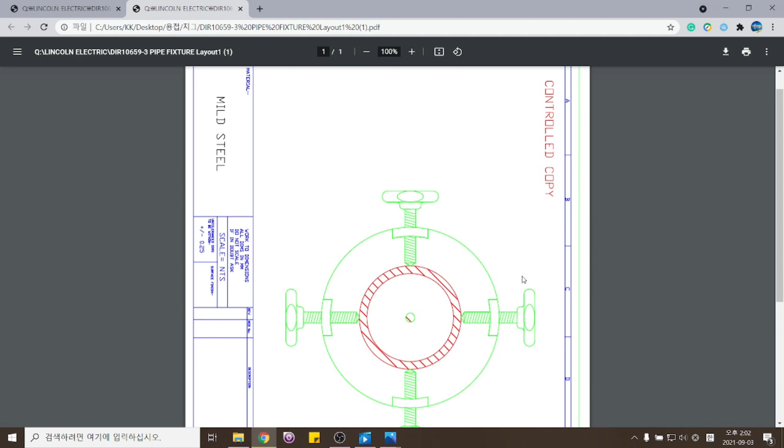After the first class, there was a question about what kind of jig we use. The answer is that we use the Lincoln jig, and here is the jig diagram, the pipe jig diagram. This is for 6G pipe.

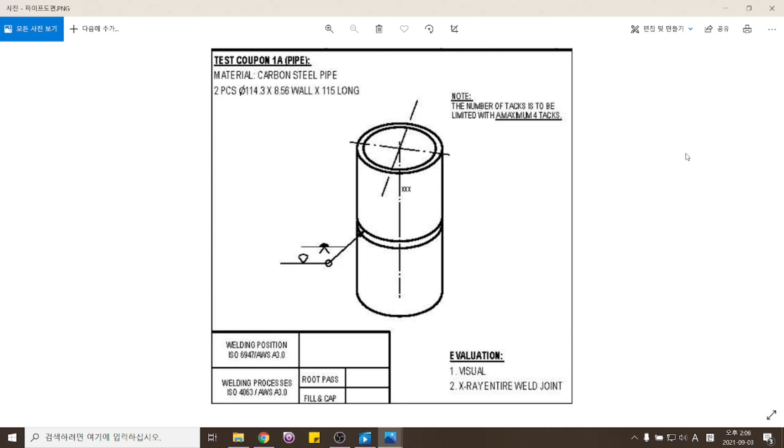As mentioned, the posture is decided right before the competition begins, along with the process to be used for root pass, fill pass, and cap pass. Right before the beginning of the actual game, the posture and working method will be revealed on site.

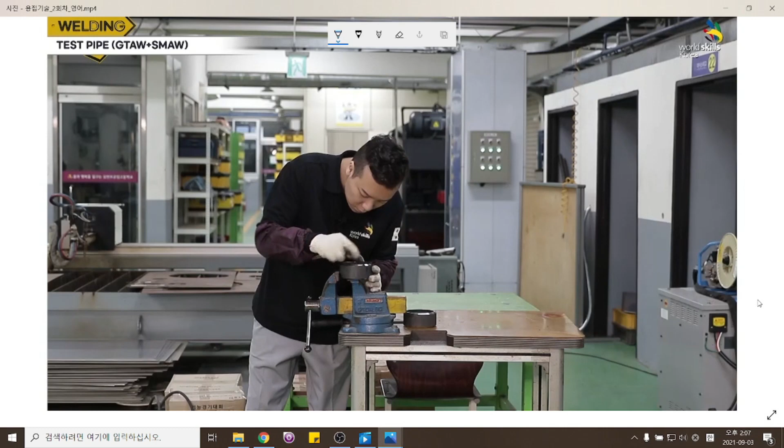Hold the pipe in a parallel position with a horizontal vise. Draw a line at the spot, allowing 2 mm root face, using vernier calipers.

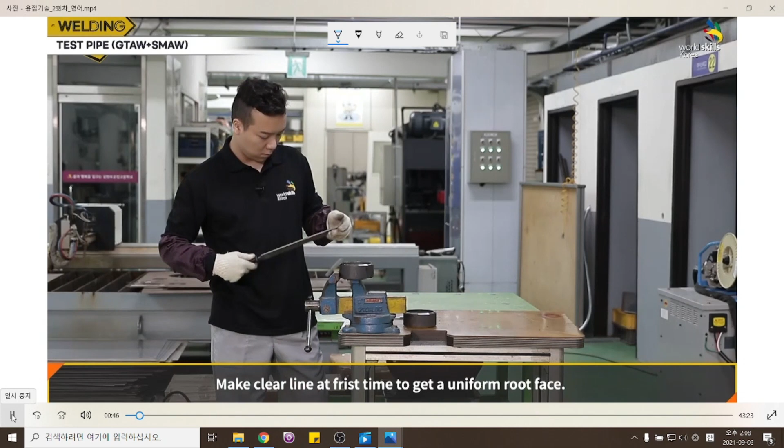Process the root face evenly up to the marked line. Check the thickness of the root face and make a flat, even horizontal surface.

After preparation of the root face, remove burr with a file.

Pipe tack welding. As mentioned, when processing the root face, if the root face size is not uniform, the welding current value becomes larger or smaller. So it is very important to process the root face evenly, because the electric current might change depending on the status of the root face.

The V-groove block you see on the screen is one we made ourselves, cut from angle steel. I encourage you to make one for yourself and use it to hold the pipe with the V-groove block, since the pipe is round shaped.

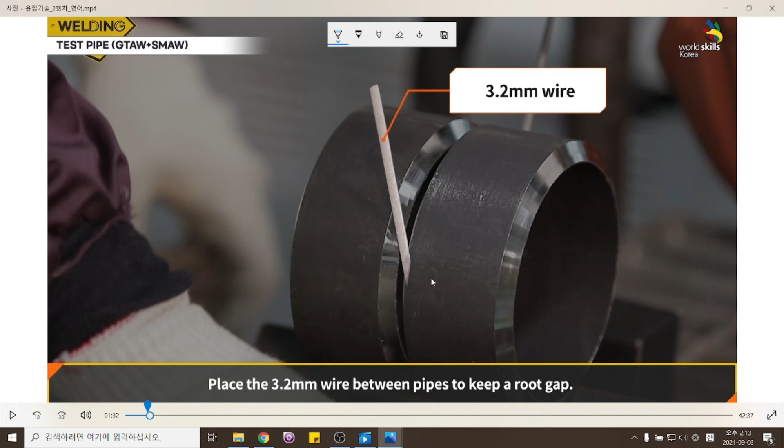Place a 3.2 mm welding rod between pipes to keep a root gap. To maintain the root gap evenly, we insert a 3.2 mm wire here, which is an SMAW wire with the coating stripped off. Using this 3.2 mm diameter wire lets us maintain an exact 3.2 mm gap between the two test coupons.

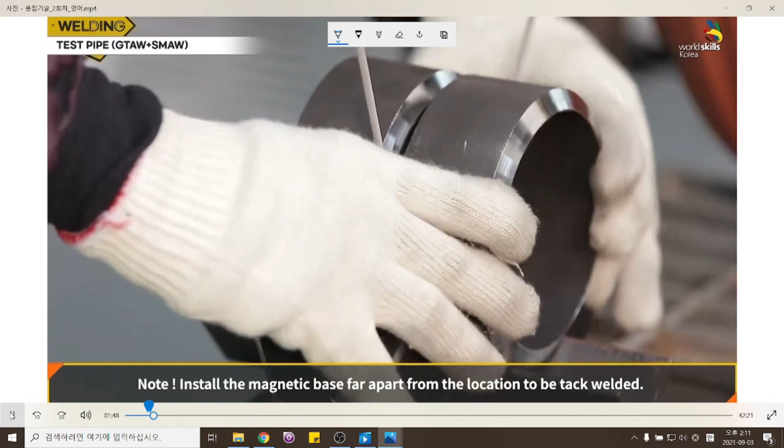Sharpen a tungsten electrode. The sharpening length shall be 2.5 to 3 times the electrode diameter, cut away 0.4 mm. The tungsten electrode used here contains 2% thorium.

When grinding the electrode, the tip must be sharp and pointed, otherwise you won't get the correct electric current value you want. The grinding wheel rotates in this direction, so you must grind in this way to avoid creating a burr. Please keep in mind the electrode must be sharp because the electric current might be affected by burr on the wire. Make sure you use your grinder in this rotating direction so there is no burr on the wire.

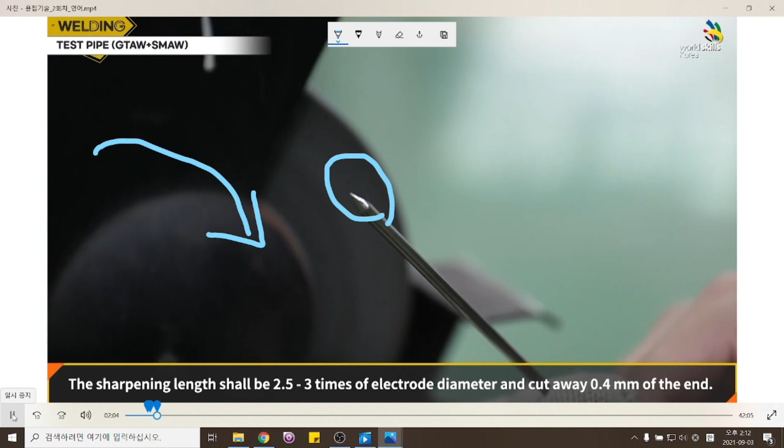Insert the sharpened electrode into the torch. The tungsten electrode stick-out shall be 1 to 2 times the diameter.

Tack welding. Weld only one tack at the 6 o'clock position. Use GTAW for the welding process, with welding rod T50, 2.4 millimeters. The length of the tack at the starting part shall not exceed 15 millimeters.

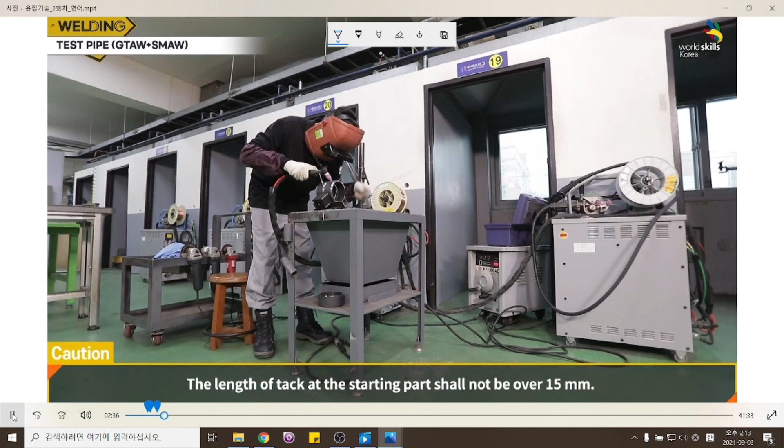Remove the magnetic base and the 3.2 millimeter welding rod inserted between the pipes. To align the overall root gap, widen the gap slightly with a spot weld hammer. Rotate the pipe coupon to make a tack at the 10 o'clock position and keep the root gap by inserting a 4 millimeter welding rod.

At the very start, it's good to maintain a root gap of 3.2 mm. I encourage you to keep the 3.2 millimeter root gap at the start point.

The tack length should not exceed 15 mm, so it's good to tack within that limit. When you tack, the tack length must not be longer than 15 millimeters.

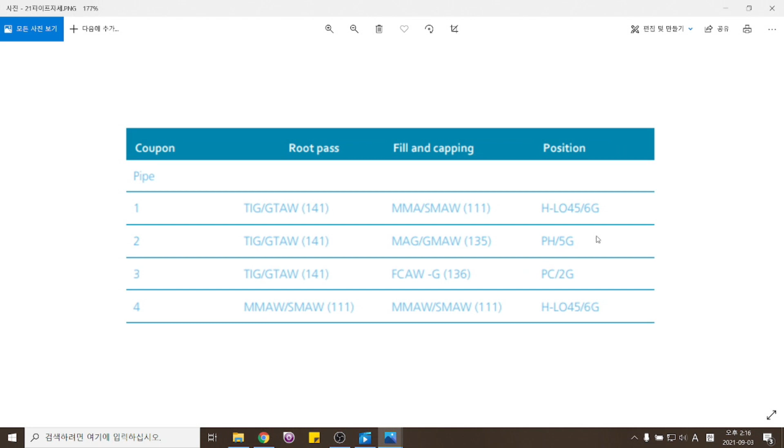I'm sorry, there was an error in the beginning and I'd like to correct it. Instead of the fourth coupon that I said we adopted, we actually adopted the first one.

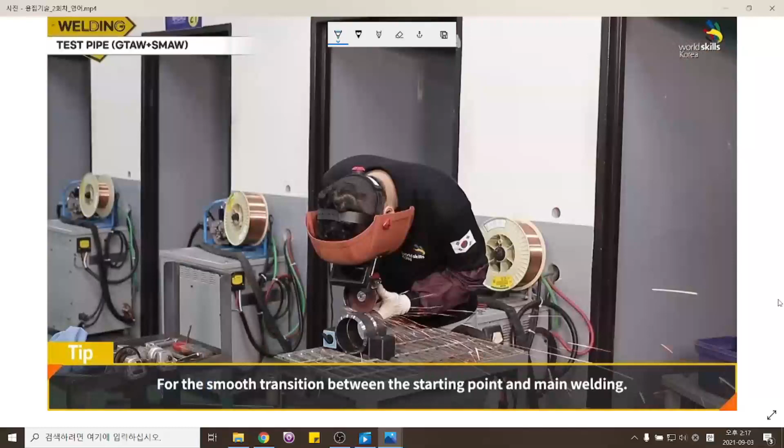Root pass of pipe joint welding. Prior to welding, grind the surface of the tack weld at the starting point. The reason for shaping with a grinder is for smooth transition between the starting point and main welding. Make a U-shaped groove on the tack weld of the start point with a grinder fitted with 4T. Check the condition after grinding and fix the pipe coupon with a 45-degree jig in 6G position. The starting point should be located at the bottom. Fix the pipe securely without any movement.

Root pass welding. GTAW is used for root pass, and the welding rod is T50, 2.4 millimeters.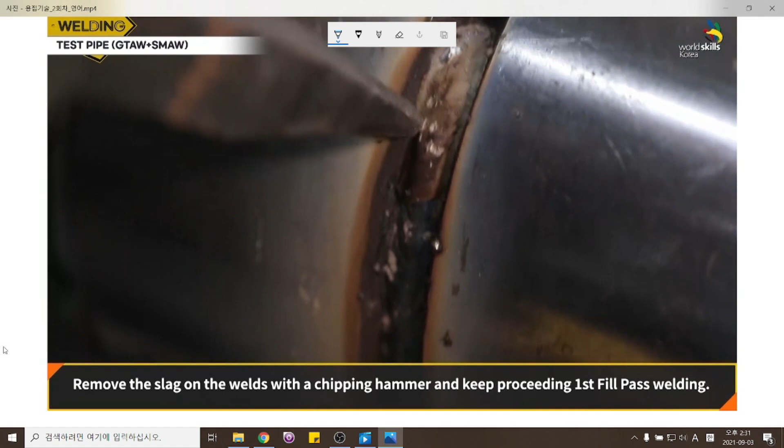Average length of SMAW electrode is 350 millimeters. Due to the limited length of the welding electrode, stop-start cannot be avoided. Remove the slag on the welds with a chipping hammer and keep proceeding with the first fill pass welding.

Adequate work angle for filler metal is 75 to 85 degrees. If the work angle is over 85 degrees to the opposite side, it makes slag stuck into the groove. Bead connection shall be ground prior to welding. By making a U-profile groove, the molten puddle can flow smoothly without overflowing into the other area.

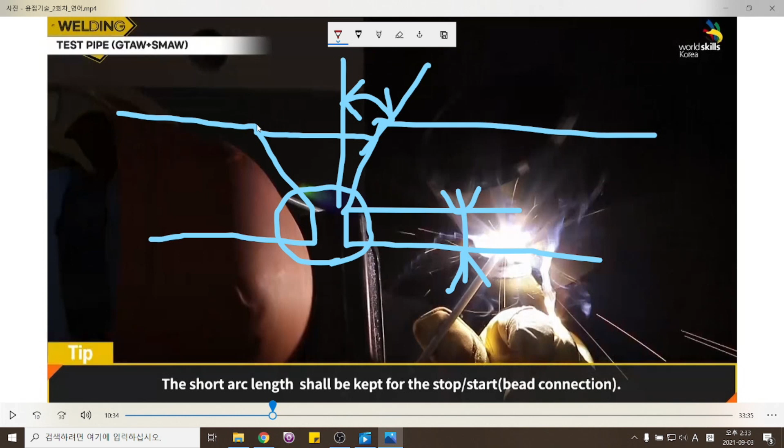Please take a look at the blue line. This is the edge line of the bevel angle, the edge part.

I also call this line the lifeline, or in other words, the control line.

When working on the fill pass, this second fill pass, you must not interfere with this control line at all.

This is because when covering the fill pass and cap pass, this line becomes the reference line. When adjusting the bead width, if this line gets disturbed, you cannot make the bead straight. The guidelines you see are the control line, so if you go over that, you cannot control it adequately.

So to keep the bead even, you must not interfere with this control line, this lifeline, while welding the fill pass. This is a very, very important part.

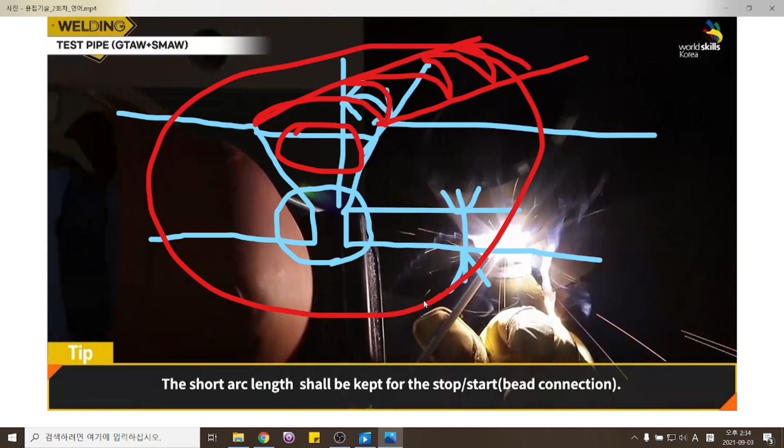The short arc length shall be kept for the stop-start bead connection. To deal with the last crater, keep the short arc length and stop quickly.

This part is the lifeline, the control line. It must never be touched while welding the fill pass. Take a closer look at the picture on the right. As I mentioned, this is the control line. See how our competitor does not interfere with those two lines while working on the fill pass.

Stop 5 to 10 millimeters ahead of the endpoint. Remove slag with a chipping hammer after the first fill pass welding, and grind off the excessive reinforcement and uneven beads.

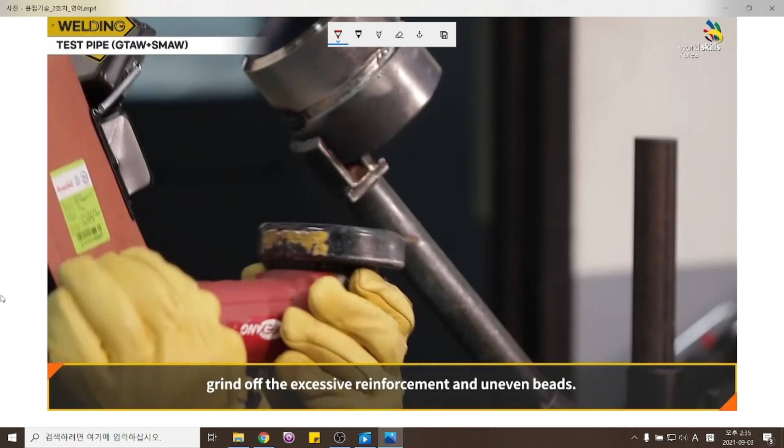The section welded in the overhead position would have a higher chance of defects because of the unstable welding position. If in doubt, clean up with a grinder and machine it accordingly.

Fifth one is the second fill pass. Weave pattern is the same as for the first fill pass. Weld the left side first and then the right side.

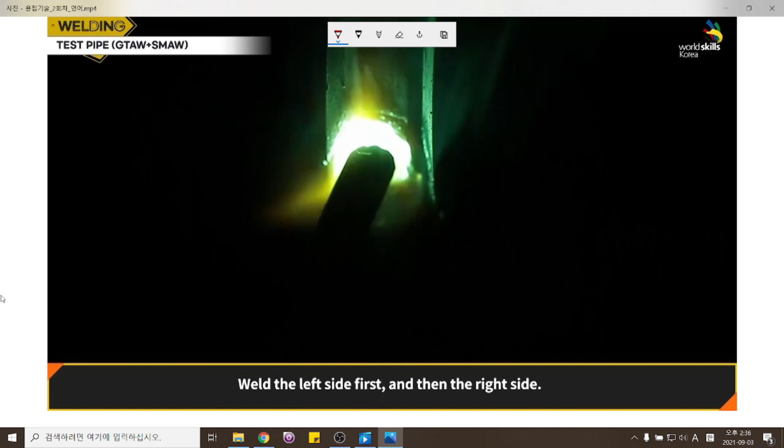Depending on the welding position, keep the travel angle approximately 70 to 85 degrees. Keep a small weaving pitch and short arc length, welding following the travel angle. Deposit the welds up to 0 to 1 millimeters below the surface at the second fill pass.

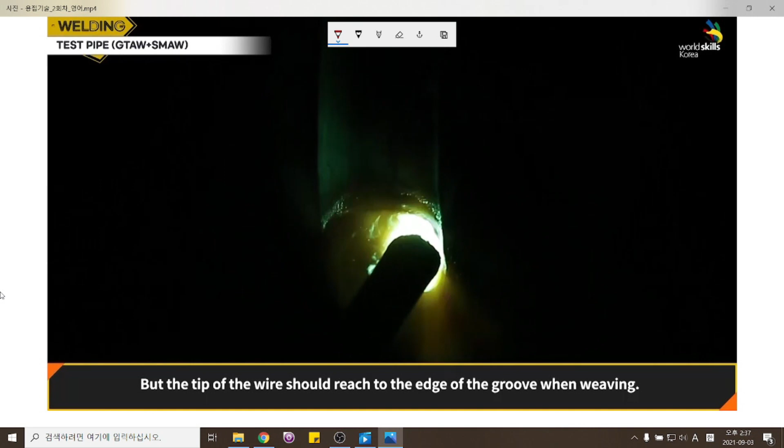Cap pass. Weave pattern is the same as fill pass, but the tip of the wire should reach the edge of the groove when weaving. For cap pass weave, keep the short arc length and pause at each edge while welding.

If travel speed is too low, there is risk of potential defects such as overlap or slag inclusion. Once the welding of each part of the pipe is finished, clean up the contaminant on the welded area. Grind the stop-start point to prevent any defects.

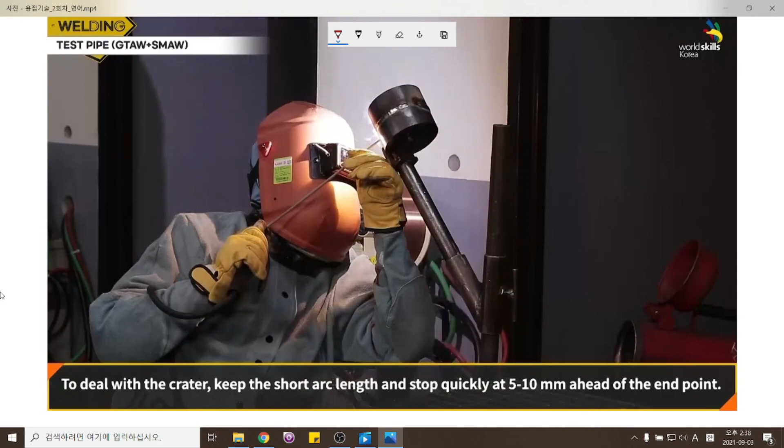Place the wire tip quickly on the next spot because the work angle and travel angle keep changing. To deal with the crater, keep the short arc length and stop quickly at 5 to 10 millimeters ahead of the end point.

Once welding is completed, remove contaminants such as slag and spatter, and clean up with a cup brush. Please check.

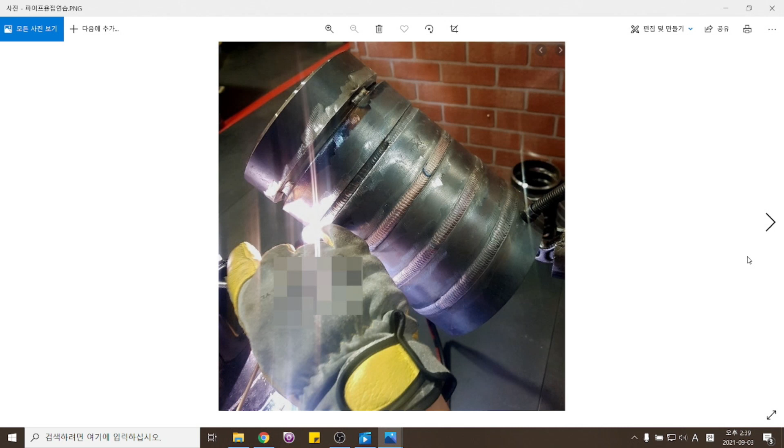So that was the end of the pipe, and considering that the pipe covers a lot of the marks, our competitors take a lot of care practicing the pipe. Let's take a look at the pictures of how we do it.

파이프를 이렇게 짧게 머시닝 작업을 해서 한 자세만 하는 게 아니고 여러 개를 붙여서 계속해서 연습 트레이닝을 합니다. So basically in Korea, competitors machine small parts of pipes, connect several pipes together, and then continuously weld all of the pipes.

이 자세 보이시죠? 이게 이제 우리 5G 자세. So this is the 5G position. 제일 어려운 부분이죠, 오버헤드 부분. This overhead part, we consider it to be the hardest.

이게 다 된 거 한번 보여드릴게요. 이게 백비드를 지금 GTAW를 해놓은 거예요. So these pipes you see are the ones that we are done with. We did GTAW to connect the pipe, take a look at how the root face covers from the inwards.

이건 지금 SMAW 표면의 캡패스. And this you see is the cap pass after the SMAW process.

이건 그때 중국에 갔을 때 찍어온 거예요. 중국 선수가 한 겁니다, 이거. Actually, this is done by a Chinese competitor in the last game.

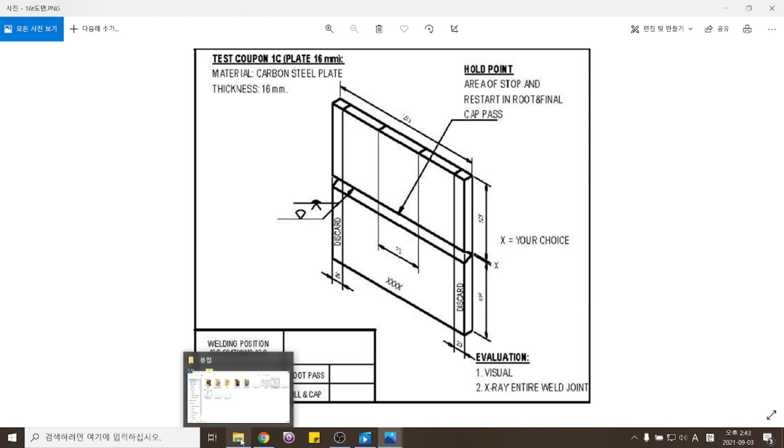As you can see in the instruction, it shows area of stop and restart in root and caps. There could be a root junction or a cap junction. Most of the time the cap was connected, but that will be decided and taught during the actual competition. It's either the root or the cap, and which one to choose will be revealed in the actual game.

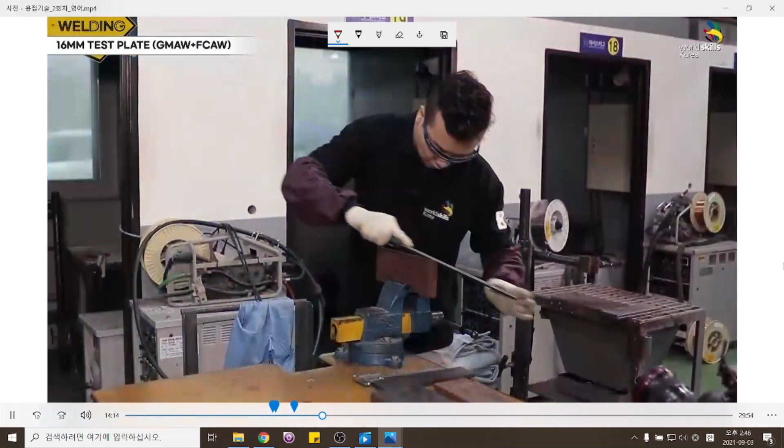Preparation of base material. As it is a single V-groove joint, make the bevel on each plate 30 degrees. Remove all rust from the root face of the base materials with a file.

After grinding the groove angle, draw a 1.2 to 2.5 millimeter line on the root face using a vernier caliper. First, use a grinder fitted with a 2T grinding disc to properly grind up to the drawn lines. After grinding, use a file to precisely grind up to the drawn line.

The reason for root face preparation: if there is no root face, the joint root will melt easily and cause burn through at the joint root of the plate. A grinder may be used to remove shop primer coating on the weld joint.

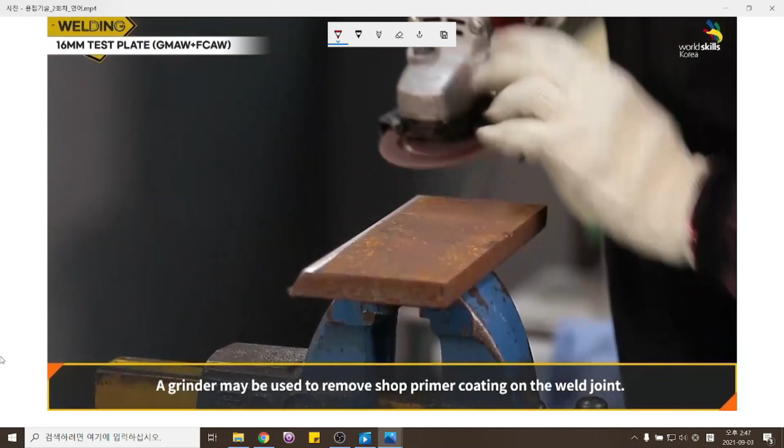Make sure that the root surfaces of the two processed base materials face each other and are uniform without any gaps. The root face of two plates should be the same so that the entire joint can be welded under the same condition. If light leaks through the gaps in the base material, it means the root surface is not constant, so process it again.

Tack welding for base material. Turn the gas switch on and adjust the gas flow rate. Use 100% carbon dioxide gas, with a gas flow of 15 to 20 liters per minute. When reading gradations on the gas flow meter, make sure the gradations and the center of the indicator are in line with each other.

Adjust the root gap and the alignment of the plates. Use a magnetic base to hold the base materials horizontally.

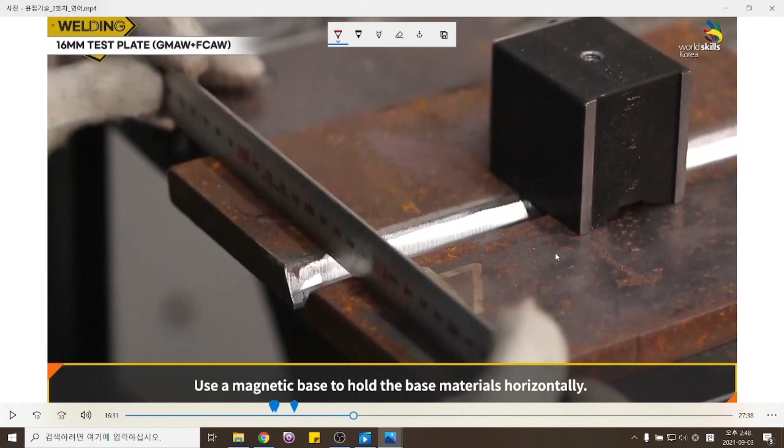As I mentioned in the first class, in Korea we use CO2 gas, but in the international skills competition, WorldSkills, they use MAG gas - argon 80%, CO2 20%. Like I mentioned before, in Korea we use carbon dioxide gas, but in WorldSkills they use gas with 80% argon.

There are pros and cons. When using 100% CO2 gas, the penetration is deep and weldability is good. There are plus and minus points when you work with carbon dioxide gas - there will be deep penetration.

However, when using MAG gas with 80% argon and 20% CO2, the appearance is nicer, but the penetration amount tends to be weaker compared to using CO2 gas. It might look good on the exterior, but the penetration might not be deep enough.

In our training we only use CO2 gas, since it's cheaper and argon gas is more expensive, so we use full CO2 gas. Like I mentioned, we use full CO2 carbon dioxide gas - it's actually cheaper as well.

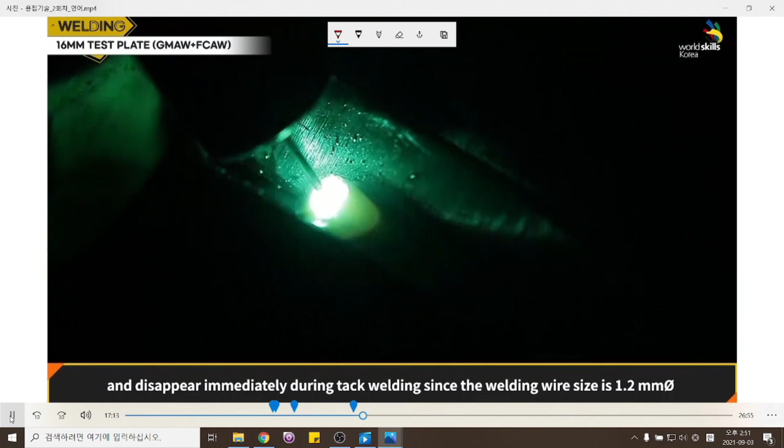There is a case that the arc does not start and disappears immediately during tack welding, since the welding wire is 1.2 millimeters, which is smaller than the root gap. Strike the arc on the groove face and make tacks.

Widen a gap at the end of the base materials. Keep a 4 millimeter gap at the end point because of the shrinkage of the base materials during welding.

If the gap is too tight, widen it with a chipping hammer and check the alignment with a steel ruler. If the gap is too wide, align the gap by hammering, and if there is a misalignment, twist up and down the plates with a chipping hammer to align them.

Insert a 4 millimeter round bar to keep the root gap at the end point. Weld tacks without damage on the base material.

If there is too deep penetration on the round bar, it becomes hard to remove it prior to welding. So, make small tacks to the point where both plates are fixed.

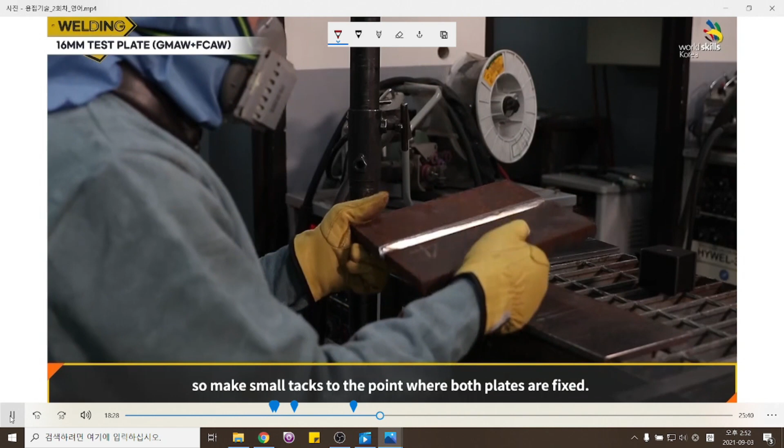When tack welding is completed, check the quality of tack welds. Check the root gap at the start and the end of the base metal and the alignment of the base metal.

If there are incorrect parts, dismantle and do rework.

Main welding preparation and pre-bending. Prior to main welding, make a U-profile on a tack weld at the starting point by grinding with a grinder fitted with a 2T disc. The reason for sharpening with a grinder is for smooth transition between the weldment of tack welding and main welding, and by making a U-profile groove, the molten puddle can flow smoothly without overflow to other areas.

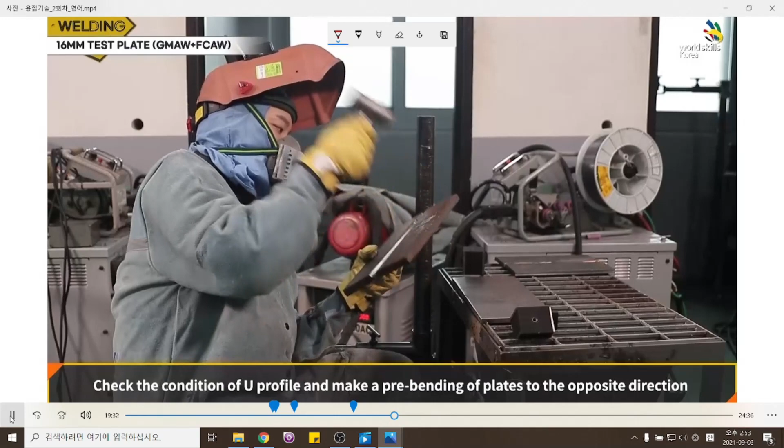Keep the U-profile, but do not sharpen the endpoint. Check the condition of the U-profile and make a pre-bending of the plates to the opposite direction from the welding surface, about 2 to 4 degrees, to prevent distortion after welding.

Root pass of base material welding. Weld root pass with the GMAW process. Prior to GMAW welding, the welder should test whether the welding current of the welding torch is adequate.

Is the length of the wire stick out appropriate? Is the welding current adequate for welding? Is the base material fusing good enough? Check the welding torch by weaving up and down on a spare plate.

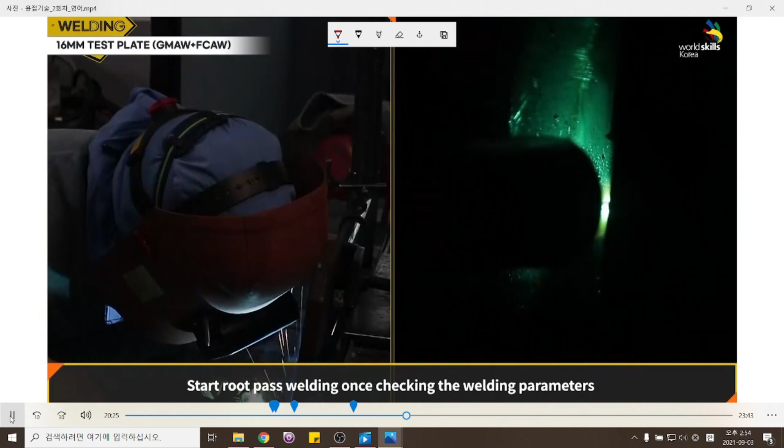Start root pass welding once checking the welding parameters. Keep the wire stick out from the welding torch as short as 5 to 9 millimeters.

For GMAW welding, the current changes depending on the length of wire. Mind the wire stick out because when it gets longer, the current decreases. When it gets shorter, the current increases.

The weave width is wide because the 1.2 millimeter welding wire is used. Weave with a U pattern.

The welder uses 100% carbon dioxide shielding gas. Not only 100% carbon dioxide, but also argon 80% and carbon dioxide 20% mixed gas can be used.

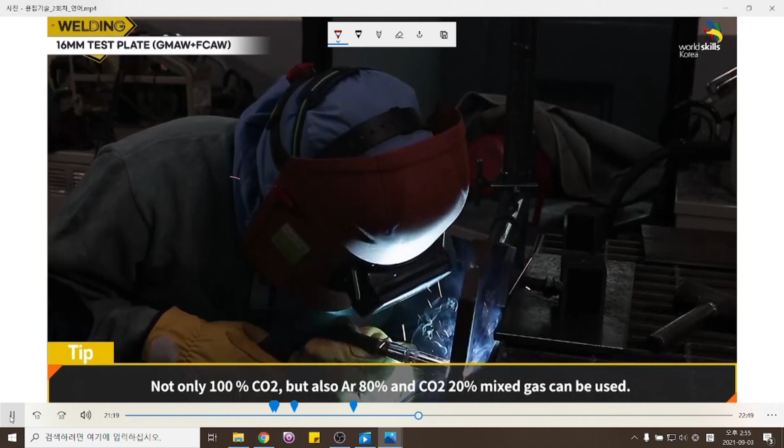If the arc length is too long, porosity may get into the welding area. Therefore, the arc length should be kept as short as possible so weld joints can be well protected by the shielding gas.

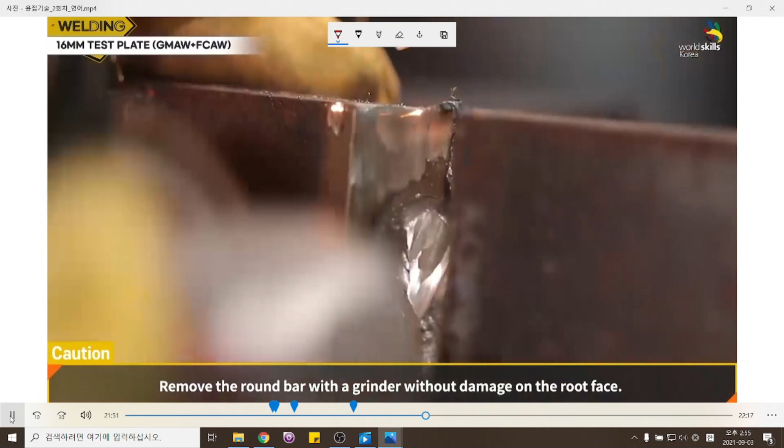When the welding puddle reached the end where a round bar was tacked, stop welding. Remove the 4 mm round bar by grinding with a grinder fitted with a 2T disc. Remove the round bar with a grinder without damage to the root face.

Make a sharp U-profile groove on the bead with a grinder to make a bead connection. Stop, start. Connect beads and continue root pass welding to the end point.

For a stop-start welding bead connection, start the arc approximately 5 to 10 millimeters back from the finished location to make a smooth transition of welding beads and reduce the chance of defects. For the end part of the plate, make 2 to 3 spot welds with the arc while maintaining a short arc length.

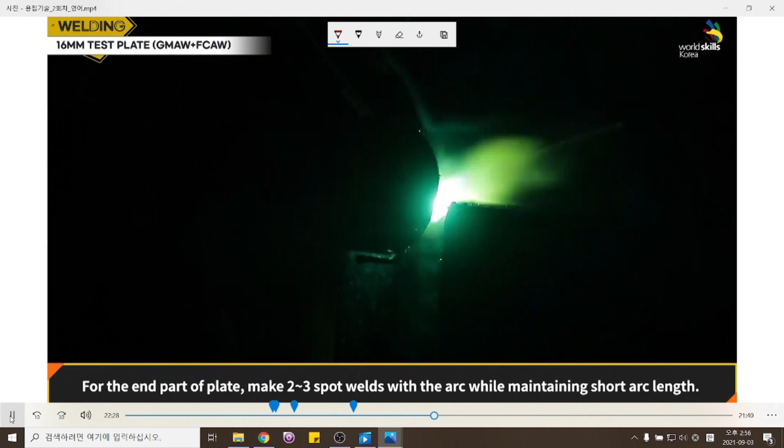Grind off excessive welding beads.

Fill pass of base material welding using the FCAW process. When welding current is not suitable, the molten puddle will flow over or cause incomplete penetration. Prior to welding, set the weld parameters and test them on spare testing plates.

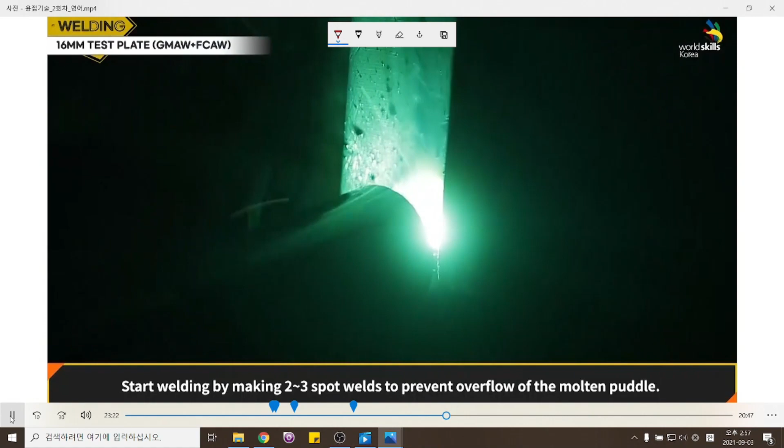A welder welds in horizontal position, starting with 2 to 3 spot welds to prevent overflow of the molten puddle. After making these spot welds, keep weaving forward, weaving widely to penetrate the edge at the V-groove completely. Keep the torch working angle at 90 degrees and the travel angle at 70 to 80 degrees.

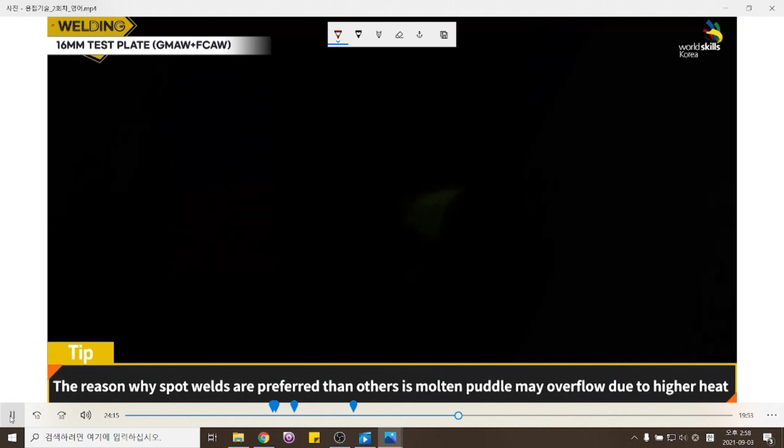Since FCAW uses high current and voltage, the travel speed and weave pattern should be maintained uniformly. If the travel speed is low, it can cause slag inclusion or porosity. For the end point, weave quickly keeping the arc length short and make 2 to 3 spot welds, since spot welds are preferred as the molten puddle may otherwise overflow.

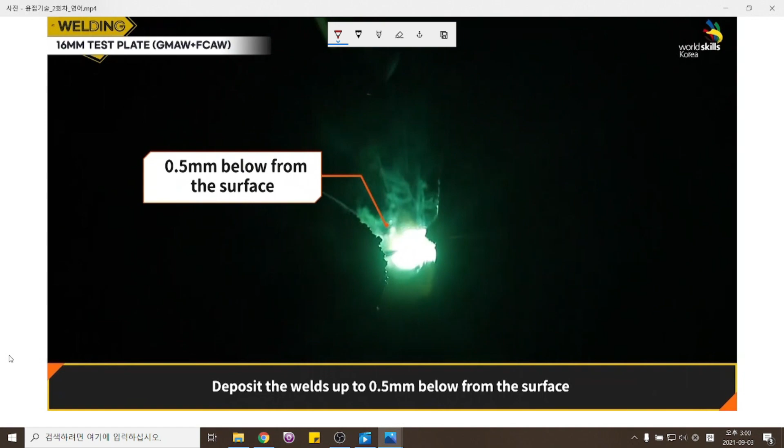Crater welding is critical, as much as the start welding, since beads could not deposit properly and the molten puddle could flow due to accumulated heat. Keep the arc length short and deposit the bead fully with several spot welds.

After the second fill pass, remove slag accumulated on the bead.

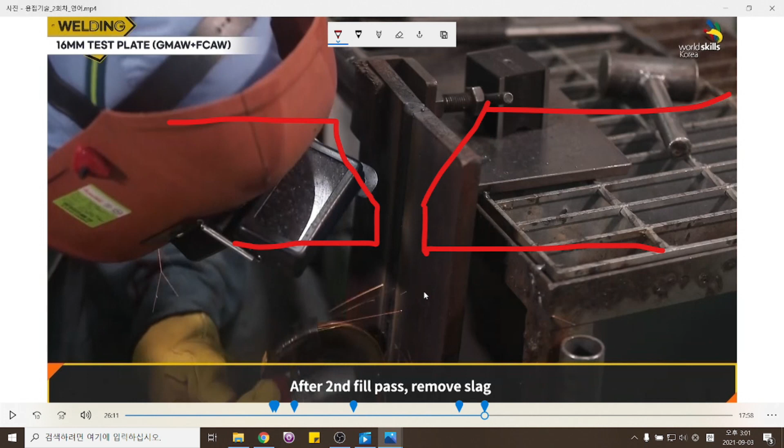As mentioned, after doing the root pass, we will do the fill pass 2 times before doing the cap pass.

If you find your cap pass bead length is longer than 23 millimeters, you might want to do overlapping welding, re-welding on the surface.

This is how you do the welding over the cap pass once again, with two overlapping passes. You will do this only when the cap pass is longer than 23 millimeters in length.

I mentioned that at the midpoint there should be a stop and return to create a joint, but the first bead can go straight without a midpoint stop and go. Only on the second bead, the second line of the bead, do you need to stop at the midpoint.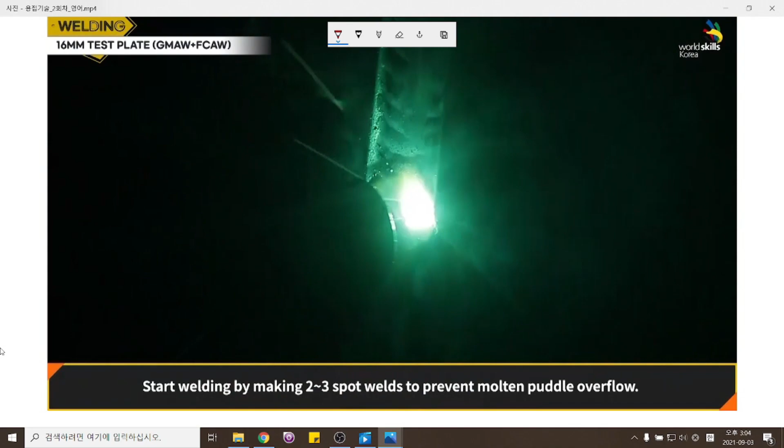Prior to welding, mark the location of a stop-start at 125 millimeters, the middle of the base material. It's recommended to mark this location in advance because the cap pass welding should have a stop-start on the middle of welds. Start welding by making 2 to 3 spot welds to prevent molten puddle overflow.

When depositing beads, keep welding along the edge of the groove straight forward. For cap pass, the weave should be in a half moon or zigzag pattern. The tip of the wire should pause just before reaching the end of the groove during weaving. The work angle should be kept at 90 degrees and the travel angle at 90 to 95 degrees, tilting the torch a little downwards from the center while welding.

Stop welding at the middle of the weld joint for a hold point inspection, then continue welding. For a stop-start joint, the competitor should get confirmation from the expert.

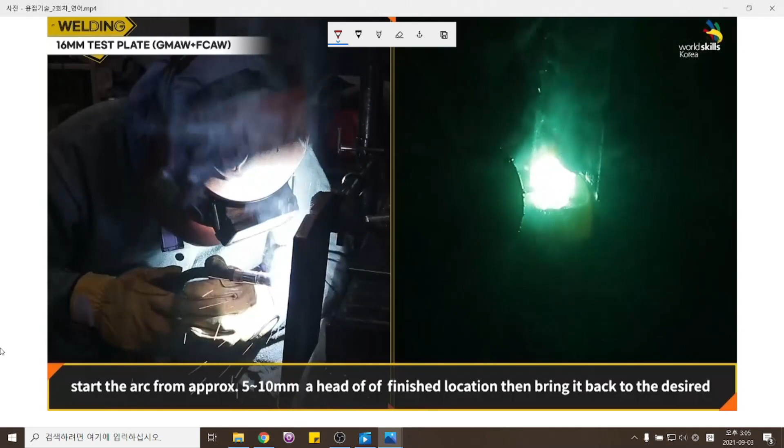For stop-start welding bead connections, start the arc approximately 5 to 10 millimeters ahead of the finished location, then bring it back to the desired point to make a smooth transition of welding beads and reduce the chance of defects. If the arc isn't paused briefly at both ends, undercut or incomplete penetration can be caused. Make sure enough material is deposited.

For the end part of the plate, make 2 to 3 spot welds with short arc length.

Remove slag with a cup brush and clean up, then get a visual inspection.

That was the end of the 16T plate coupon.

Let's take a look at the video. In T fillets, there were brackets.

Of plates, I'm sorry, brackets. Measure the plate size and confirm the assembly location of the plates, as the size of the bottom and vertical plates are different.

First, the coated shop primer or oxide layer on weld joints shall be removed. This coated layer, also referred to as shop primer, serves to prevent the oxidation of plates. Remove any contaminant and shop primer with a grinder fitted with a 2T disc.

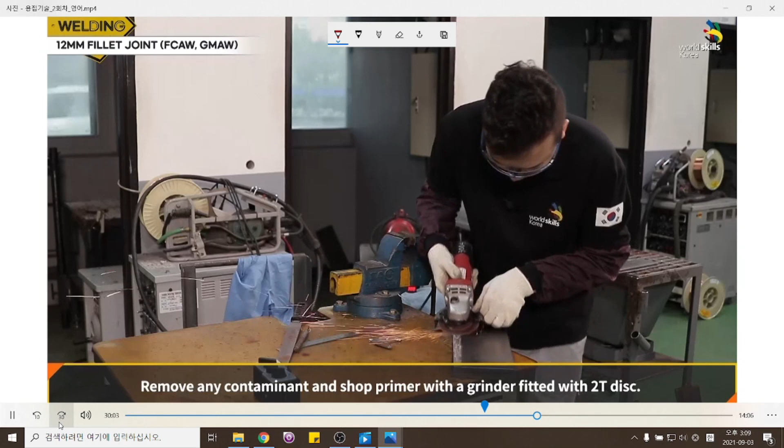The part where 2 plates contact has been pre-machined. You will lose marks if you machine this part additionally.

Therefore, remove contaminant only with a cup brush. Assemble the plates as a T-connection, positioning them correctly.

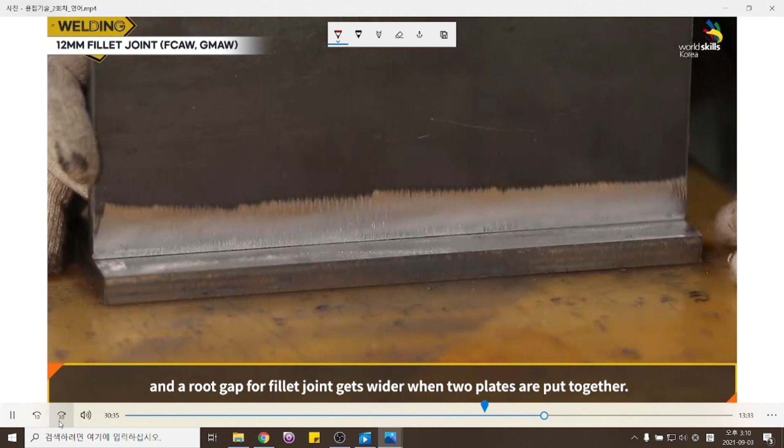Check if the shop primer on the weld joint is completely removed, and that the root gap for the fillet joint gets wider when the 2 plates are put together. Confirm that the gap between the base materials is tight, with the plates contacting without any gap.

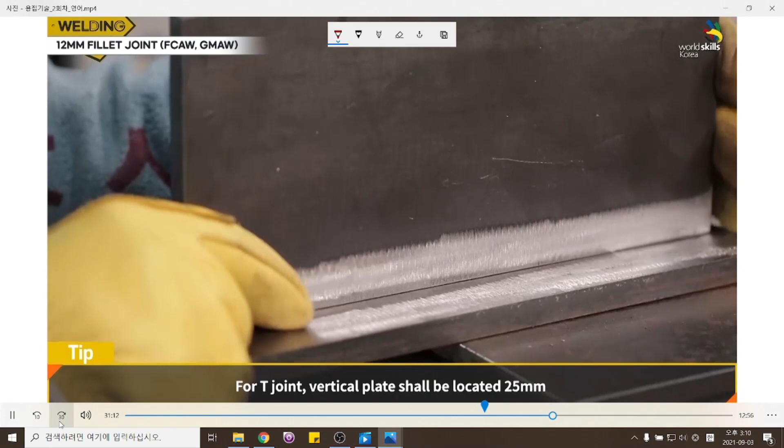For the T-joint, the vertical plate shall be located 25 millimeters inside from the edge of the bottom plate according to the drawing. Check the location of the vertical plate, whether it is 25 millimeters inside from the plate edge, with a steel ruler.

Fix the vertical plate with a magnetic base after checking the location. Check the location of the vertical plate once again, whether it locates 25 millimeters inside from the plate edge, with a steel ruler.

If required, adjust the plate location by hitting lightly with a hammer.

Fix the two plates tightly without any gap using a vertical magnetic base. If there are any gaps between plates, it could cause slag inclusions or incomplete penetration.

After fixing the plates, confirm the angle between the two plates is maintained at 90 degrees with a square. Then remove the magnetic base.

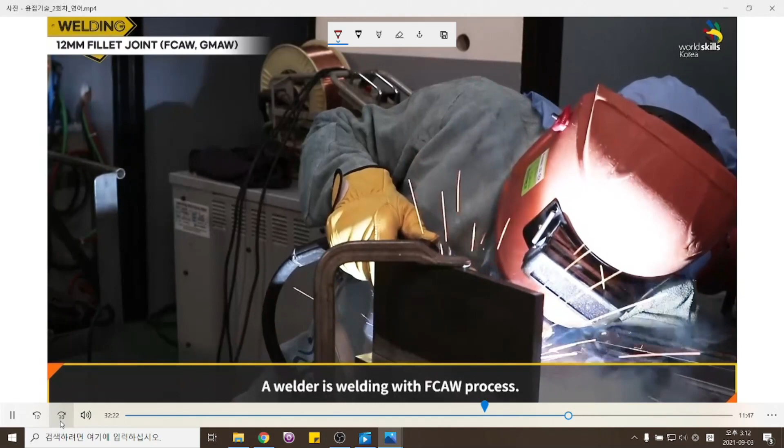One-point temporary welding is applied to the back of the welding line. The welder is welding with the FCAW process. The length of the tack weld on the other side of the weld joint shall not be over 25 millimeters.

The number of tack welds for the fillet joint is 3, including 1 for the other side of the weld joint and 2 for the edges of the plates. Make 1 tack weld at each edge of the plate.

Check the condition of the tack welds and confirm whether the angle of the two base materials is maintained at a right angle using a right angle ruler. Not only at one location, but it should also be checked from several locations, including the start and finish points.

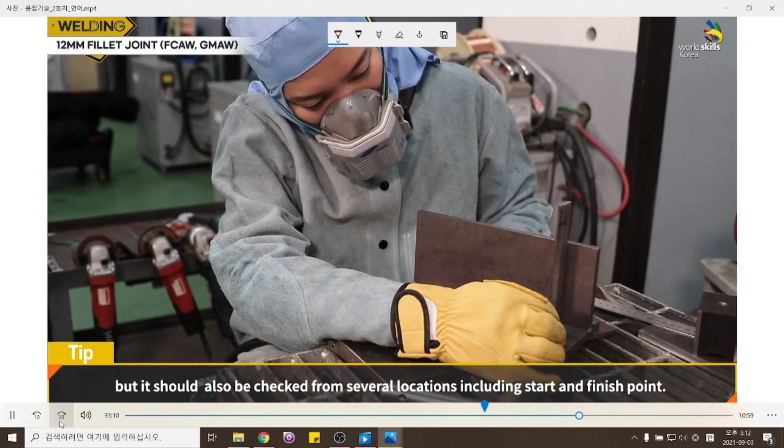Mark the fillet guideline by using a 10 millimeter thick plate. Make a clear line by marking it a couple of times, since while welding the marking line could become invisible.

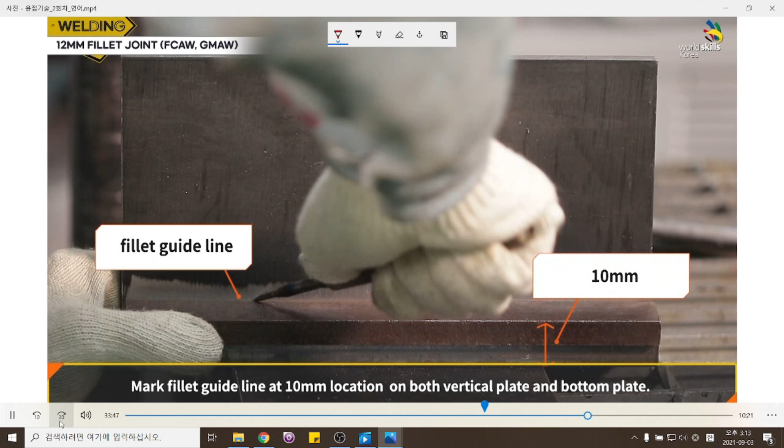Mark the fillet guideline at the 10 millimeter location on both the vertical plate and the bottom plate. For welding, complete the weld up to the marked guideline.

If the fillet welding size line is still visible after welding, it means that the bead has not been sufficiently accumulated, resulting in an insufficient size of fillet weld.

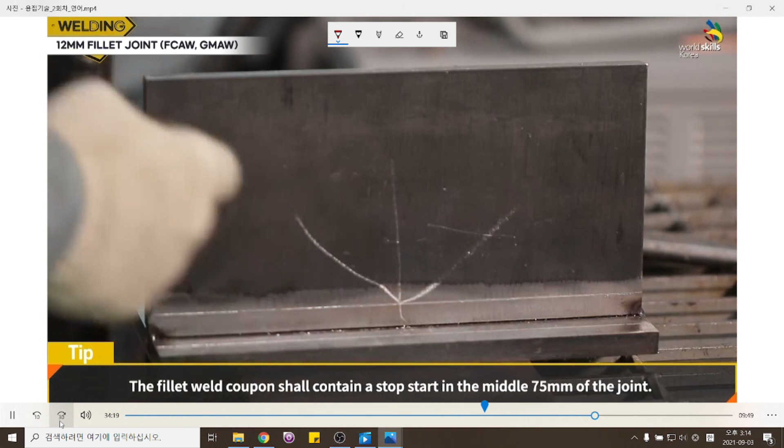For fillet welding, a stop-start shall be made for the root and cap pass according to the competition rule. The rod joint should be made within the rod joint section of 75 millimeters, with margins on both sides based on the center of the plate.

For this reason, it's recommended to mark the location for a stop-start in advance. The welder is welding in horizontal position with the FCAW process.

For the FCAW process, weld with stringer beads without weaving. Allow time to fuse the corner sufficiently and make a stringer bead, since it is hard to penetrate the corner with a weaving technique.

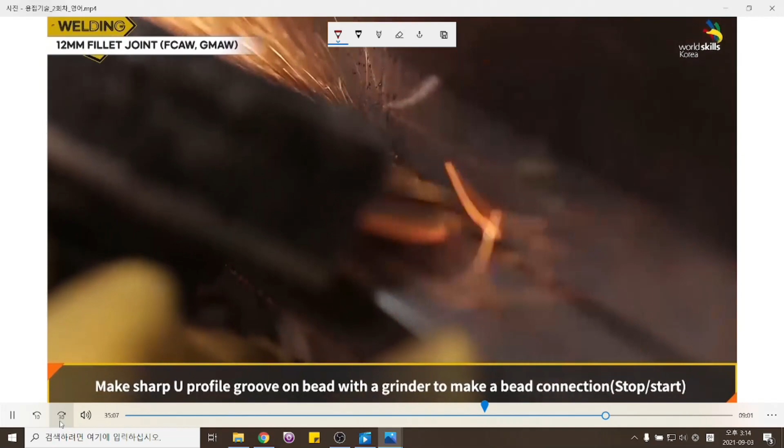When the welding puddle reaches the marked stop-start location, stop welding. Make a sharp U-profile groove on the bead with a grinder to make a bead connection for the stop-start.

For a stop-start welding bead connection, start the arc approximately 5 to 10 millimeters back from the finished location to make a smooth transition of welding beads and reduce the chance of defects.

For the root pass, the joint root fusion is the most critical part. For the end part of the plate, make 2 or 3 spot welds by keeping a short arc length.

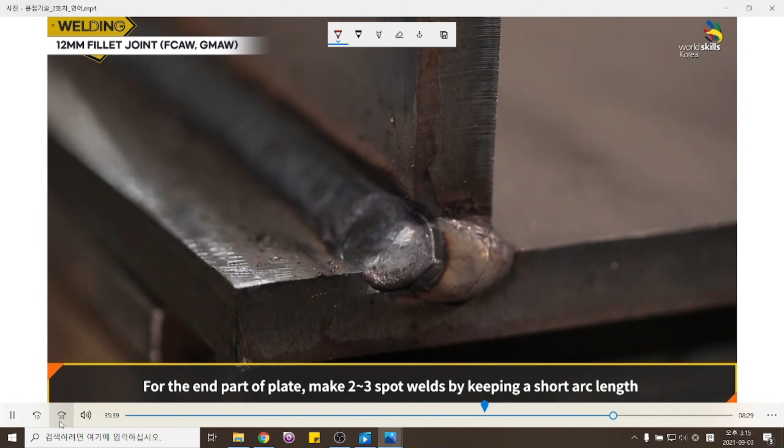When root pass welding is completed, remove slag with a chipping hammer and clean up contaminants with a cup brush.

Remove the spatters on the weld surface with a hammer and a chisel. Remaining spatters on the plate make it difficult to identify the fillet guideline, so it is recommended to remove spatter after welding each pass.

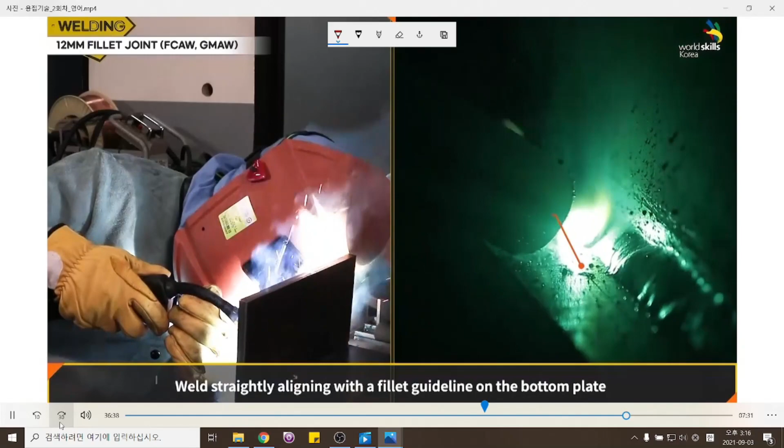The most critical point for cap pass welding is achieving the required weld size. Weld straight, aligning with the fillet guideline on the bottom plate.

For fillet welding, welding shall be completed within a minimum of 2 passes or a maximum of 3 passes. Remove slag on the welds with a chipping hammer.

To prevent slag inclusions for the next pass, clean up contaminants with a cup brush.

To make a stop-start for the final pass welding, mark the location of the stop-start. Check the drawing carefully for each competition because the requirement for stop-start could change for each competition.

FCAW second cap pass.

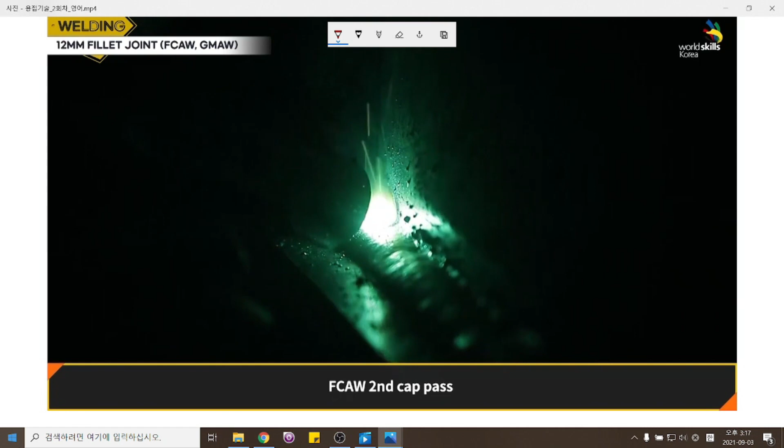Fill the bead up to the upper line of each fillet welding size. Generally, the weaving technique is not used for the horizontal position.

But when a bigger fillet size is required, the weaving technique needs to be applied. For fillet welding, achieving the required fillet weld size is more important than applying the weaving technique.

Competitors will decide whether to apply the weaving technique or not depending on their work, since an undersize fillet weld will cause losing marks during the marking process.

When the welding puddle reaches the fillet guideline at the stop-start, stop welding and remove slag on the beads.

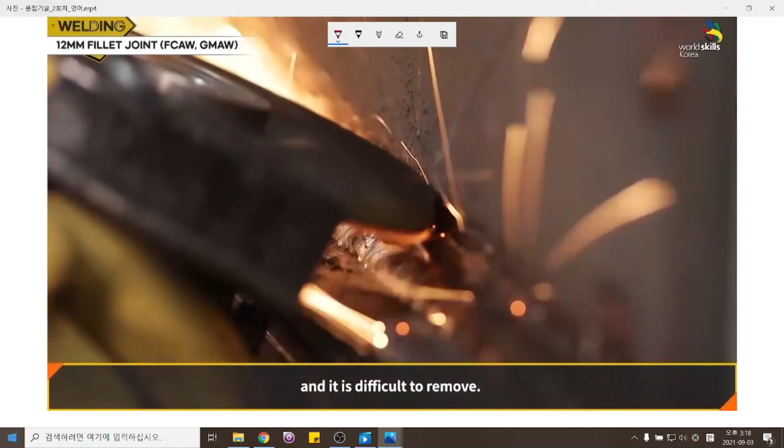Make a U-shaped groove with a grinder fitted with a T-disc for bead connections. Carefully make the U-shaped groove for bead connection only, since too much grinding work creates lots of grinding marks that are difficult to remove.

For a stop-start welding bead connection, start the arc approximately 5 to 10 millimeters behind the finished location to make a smooth transition of welding beads and to prevent welding defects. To prevent overflow of welding at the end point, make 2 or 3 spot welds.

Remove slag with a chipping hammer and clean up contaminants with a cup brush for the completed coupon.

Now we've seen the T-fillet, done in FCAW 2F position. After this work is finished, you saw the last pass, right? The last pass must include a stop and return. If you don't get this stamped, it will not be scored. So that is how we covered FCAW with 2F position. Please keep in mind that in the last final line, you should do the stop and return, otherwise you will not be marked.